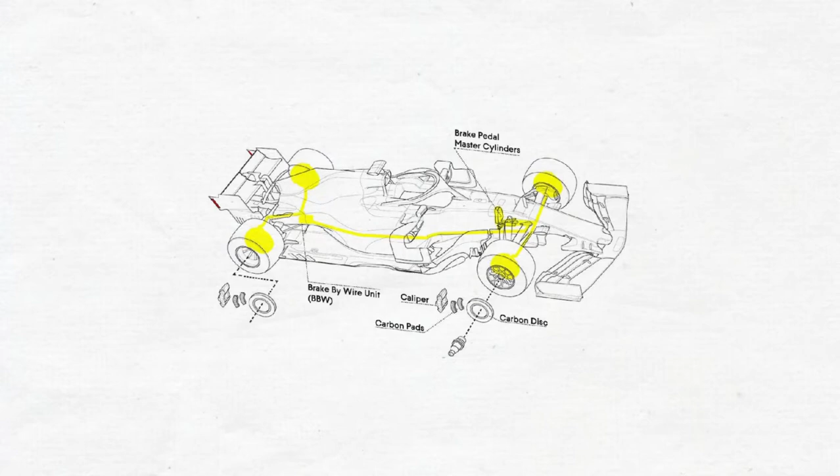A vehicle's braking system is the most crucial safety system available to the driver. It allows the driver to consistently and reliably reduce the vehicle's speed, avoid obstructions, maneuver traffic, and/or bring the vehicle to a complete stop. The braking system used by the Lausanne Motorsports team in their competition vehicle is designed to withstand higher temperatures and higher stress levels during its period of operation than a conventional vehicle.

Our team has been tasked to design a complete hydraulic braking system for the Lausanne Motorsports team, staying within our budget, time frame, and allowed rules. Through the course of the year, our team has been able to surpass numerous challenges, the first of which being the communication and coordination obstacles due to the unexpected global pandemic.

In the initial stage of this project, we were tasked with drawing up a comprehensive problem statement, outlining our stakeholders' application needs, prerequisites for each stated need, and approximate timeline for each delivery.

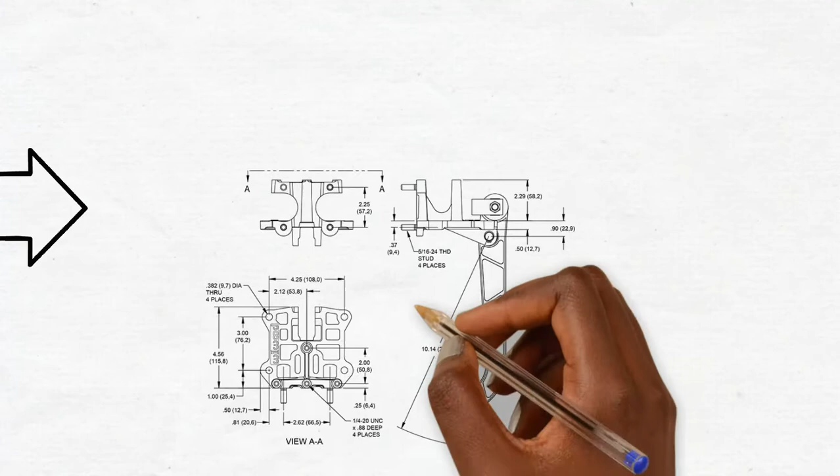Following this, we took into account design parameter thresholds given by the governing body, the FSAE. The most crucial design parameter related to the maximum force applied in the brake pedal box without component failure, and the overall four-wheel independent operation to improve redundancy and minimize vehicle stability compromise under braking.

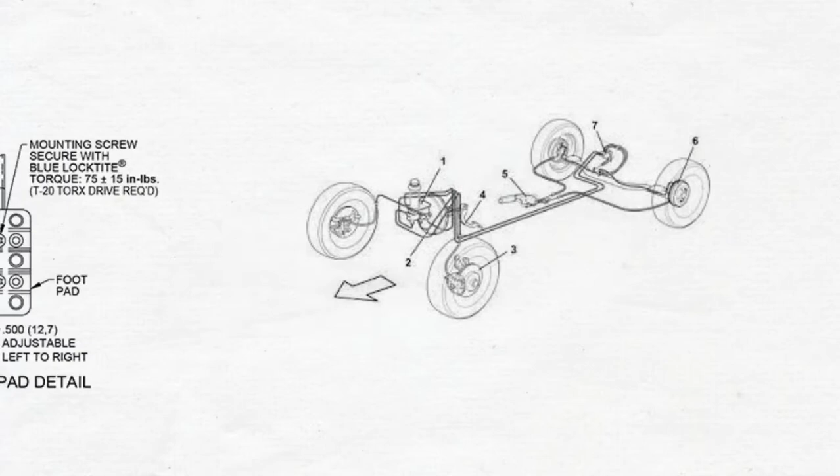Again, clarifying our problem statements, we revisited all stakeholder groups, their relation to the project, and how requirements supported our current problem statements. Our design is driven by a modular lightweight topology to maintain the vehicle's competitive edge and also allow a system to be easily integrated with different parts or components from another system to be designed the following year. We began material selection based on operation limit thresholds for each component.

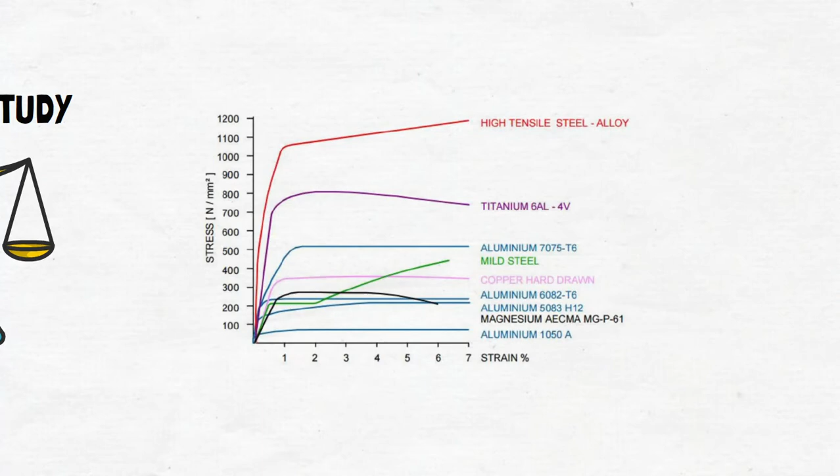For the components with high operating temperatures, like the brake pads and rotors, material selection was driven by heat dissipation capacity, strength to mass ratios, and thermal expansivity.

While for components hosting high hydraulic pressure, material selection was driven by strength to mass ratios, specific material strength, material flexibility on brake lines connecting to master cylinders, and pressure transducers.

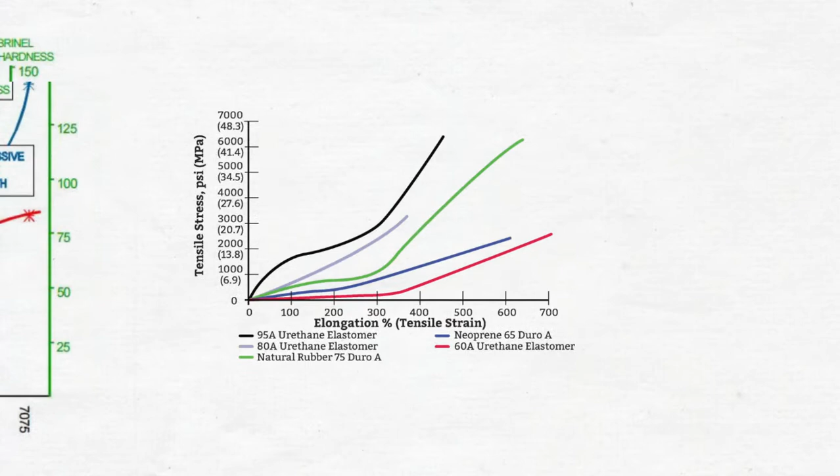We began procurement, sourcing our most critical components first. These are parts which their size and assembly location will directly influence the placing and selection of other components on the hydraulic circuits. With component selection complete, a fixed design topology, and material selection complete, our budget had now been approved, and our 2021 capstone project was starting to come to life.

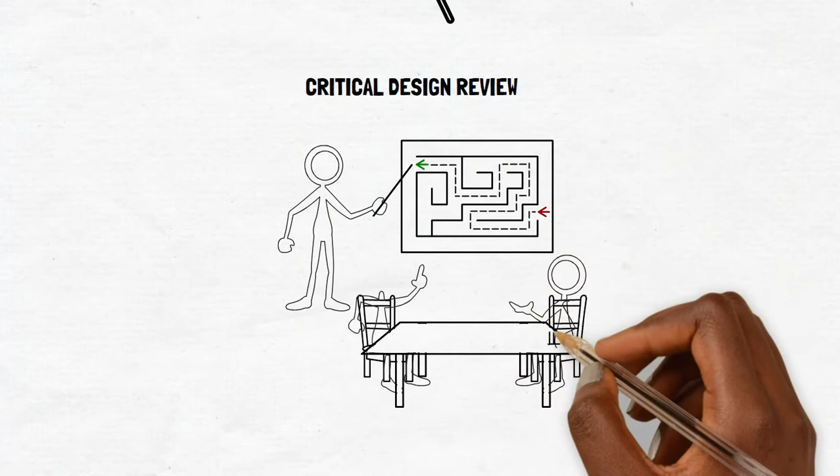At this point, our hydraulic braking system was starting to take shape, and we were ready to begin a critical design review. We outlined three distinct design solutions to the proposed problem, each with their merits and drawbacks. We carried out a detailed design comparison analysis to compare each of the three designs driven by our stakeholders' needs, safety, cost, and time. We then selected our optimal hydraulic brake design based on these matrices.

In our baseline design, we decomposed the entire hydraulic system into its core operational components, the first of which being the brake caliper. The brake caliper is a major component of the entire hydraulic system. It is responsible for slowing down the wheel through friction with the brake rotor. This component withstands temperatures above 200 degrees Celsius during operation, with pressures ranging just under 7,000 kilopascals.

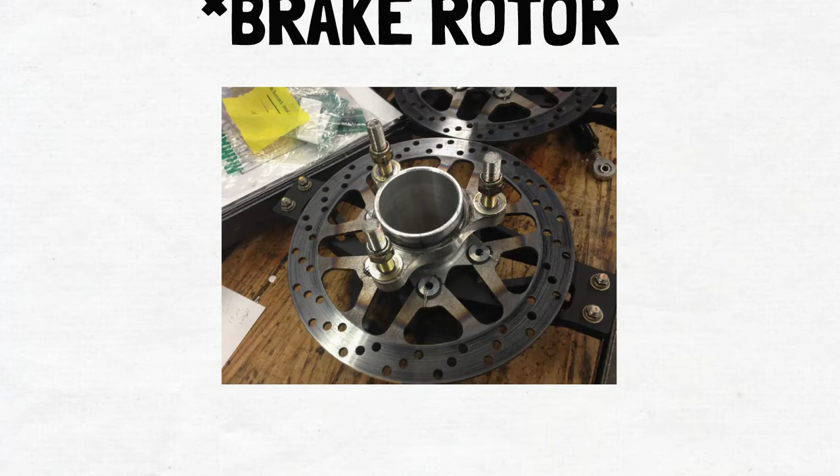Secondly, we have our brake rotor. This is the rotating component of the system fitting over each axle. The brake rotors are responsible for converting rotational kinetic energy into thermal energy. For this reason, the rotors become a major friction surface in our braking system and will withstand temperatures in excess of 600 degrees Celsius during operation. Optimal heat dissipation on this component has become a crucial concern in our design.

Thirdly, we have our brake pads. Brake pads are a major friction component on disc brake systems. They are responsible for creating friction with the brake rotor as the piston from the caliper squeezes them against the rotating surface of the brake rotor. Material selection of these components is most crucial, as it will undergo extreme pressure and extreme heat during operation.

The next component in our hydraulic system is the master cylinder. The master cylinder acts as the heart of the entire hydraulic system. It is responsible for transferring brake fluid under positive hydraulic pressure through the brake lines to each caliper piston.

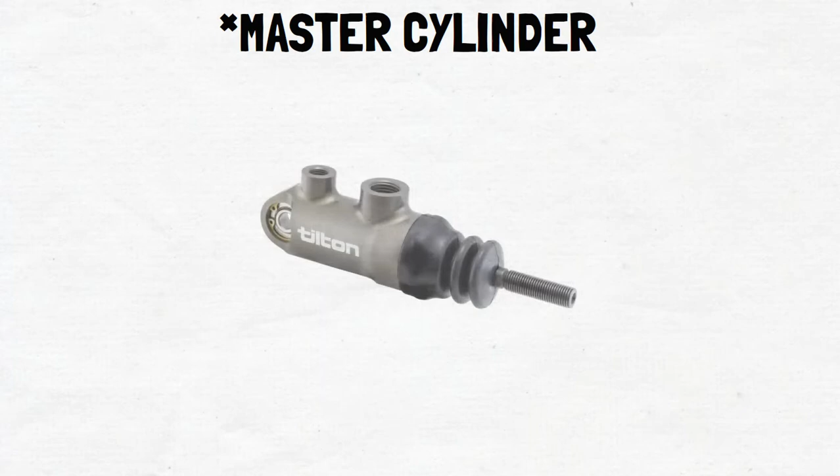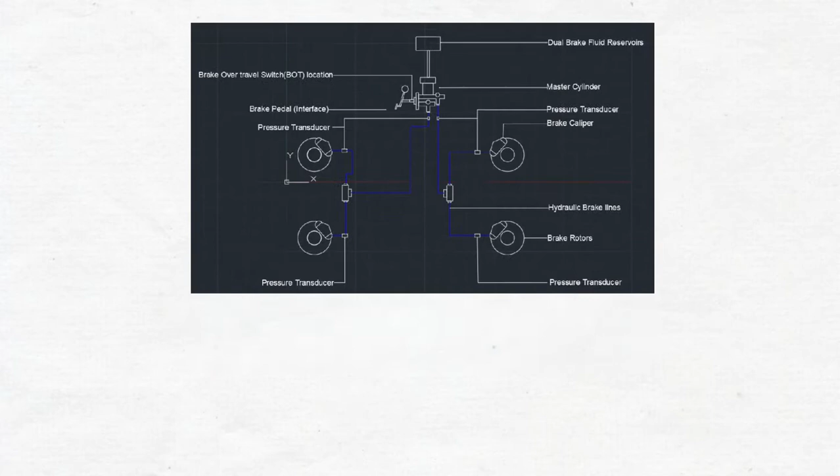Our current design makes use of a tandem-type master cylinder. This way we can have two independent hydraulic circuits with a single control, adding additional redundancy in the event of failure of one circuit. Our master cylinder is also fitted with independent hydraulic reservoirs and an adjustable proportioning valve.

As the master cylinder is the pump of the entire hydraulic system, brake lines are the transport unit of the entire hydraulic system. The lines used in our brake system will consist of a combination of rigid and flexible piping, with material selection currently set to stainless steel and rubber. The stainless steel braiding is used for improved cooling where possible, and rubber piping around the pedal box to allow dynamic pedal box positioning without brake line adjustments.

As said earlier, the master cylinder is equipped with an adjustable proportioning valve to allow brake bias control as per stakeholder or driver needs. We make use of a diagonal circuit pattern for the system's independent circuitry to reduce negative effect of vehicle weight distribution in the event where only one circuit is in operation.

The pedal box can be seen as a user interface between the brake system and the driver. It is designed to withstand forces in excess of 2000 newtons, with material selection set to be checkered aluminum.

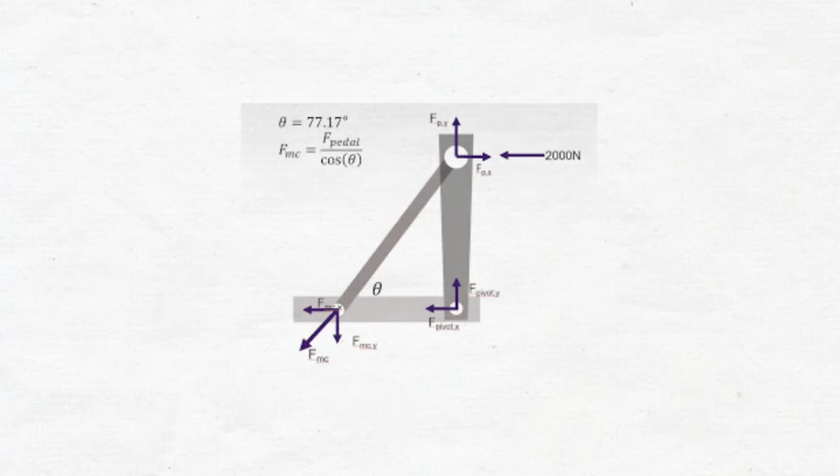To maximize the driver's mechanical advantage, our design aims to maximize the pedal ratio. This is the force acting on the master cylinder pistons divided by the force acting on the actual brake pedal.

We have also selected a swing mount pedal box, which allows us to exceed our force requirements with a lightweight aluminum frame and a high strength reinforced I-beam forged pedal arms, providing pedal ratios of 6.25 to 1.

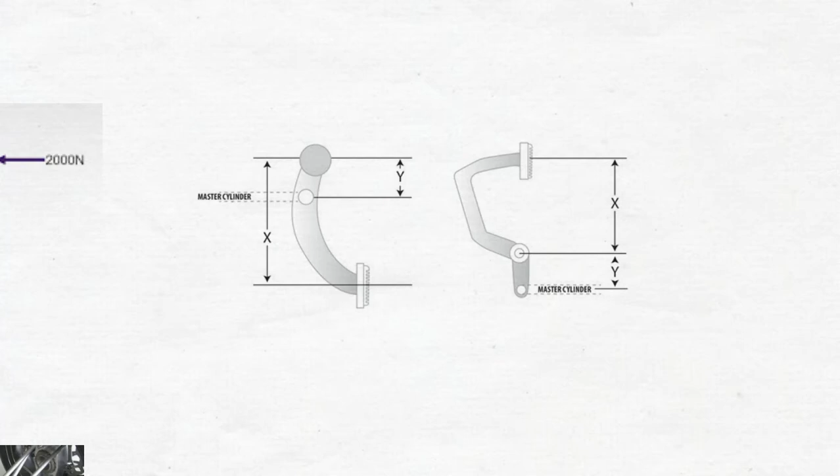Installed brake lights are in accordance with FSA rules, red in color on a black background, rectangular mounted as per 2021 competition rules. The brake light encasing will be designed with AutoCAD's 3D suites.

The circuit board is designed using Eagle suites. The pressure transducers are in series with the brake lines before each caliper. They convert hydraulic pressure into an analog value. Our current design makes use of Honeywell's MH series pressure switch, capable of sensing pressures between 24 kPa and 2700 kPa, with a maximum operating temperature just above 120 degrees Celsius.

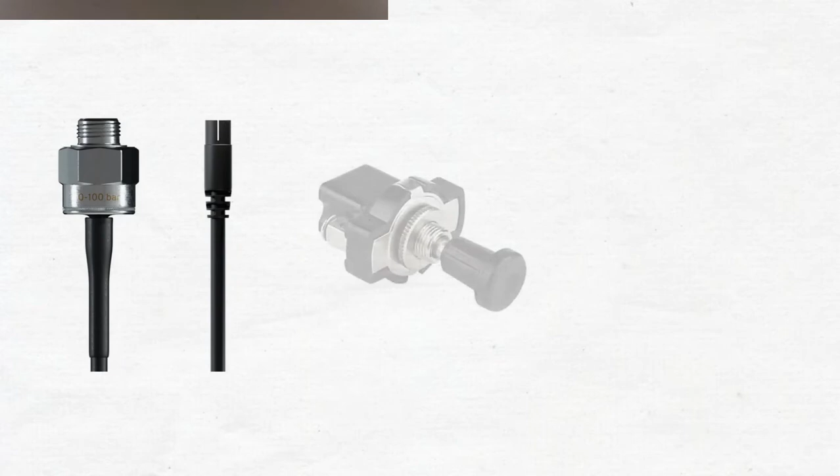The brake over travel switch is an FSA requirement and added redundancy in the event of complete brake failure. If brake pressure is lost when the pedal is pushed, the pedal will travel beyond its normal range, with insufficient pressure being applied to the caliper pistons.

The brake over travel switch will be activated, and when this condition is met, electrical power to the fuel pumps and the ECU will be interrupted and the engine will shut down. This switch is implemented as per FSA competition rules with analog components for additional system redundancy.

As known, our design solutions are subject to inherent risk, benefits, and drawbacks. Our trade study matrix provided an effective way to identify the most acceptable technical solution among our set of proposed solutions.

Our final design showed excellent heat dissipation capacity. The major property responsible for extracting heat from the circuitry is the use of braided steel hydraulic lines, along with the proposed sections of the vehicle chassis.

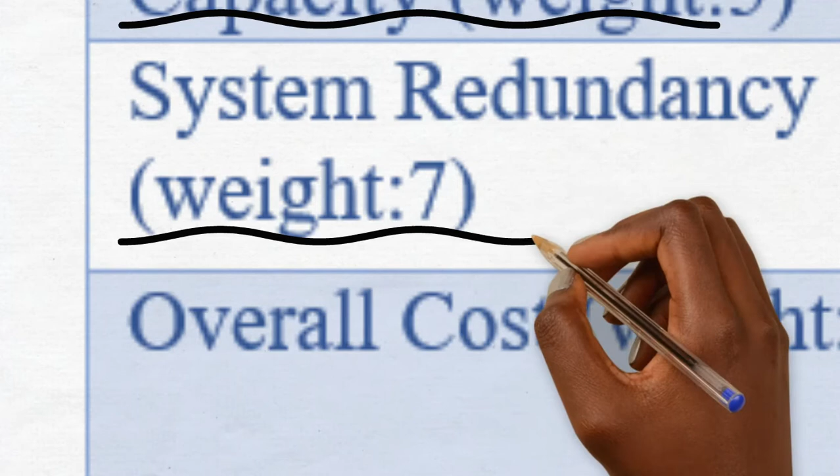Our solution also improved system redundancy, making use of tandem-type master cylinders for individual circuit control and a diagonal connection between each wheel. In the event of failure of one circuit, this solution minimizes the effect on the vehicle's weight distribution under competitive braking conditions.

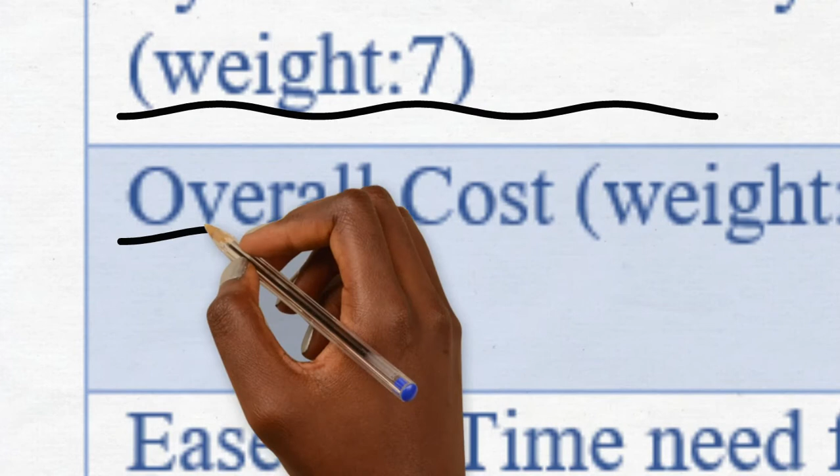Making use of a tandem-type master cylinder integrated with proportioning valves for each circuit also brings down the cost of the entire system. Our use of sourced components from approved FSA manufacturers also provides additional redundancy and improved modularity.

Sustainability can be understood as avoiding or minimizing the reduction of our natural resources to maintain ecological balance, in other words, meeting our needs in the present without compromising the needs of the future. Sustainable processes were a major concern and regarded as functional elements in every design phase. Through each design phase, we considered six interwoven factors in system design which we can control.

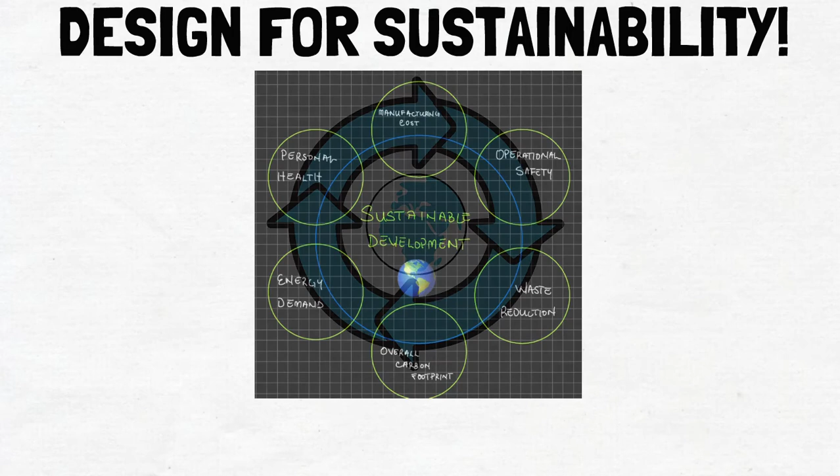The first was an initial analysis to see how each phase could improve the system's overall environmental friendliness. The second was a way to minimize costs of manufactured components.

After minimizing costs of manufactured components, we strive to minimize energy consumption during component design, manufacturing, and operation. Manufacturing and production planning will be done between cutting and bending processes during pedal box fabrication.

A fourth factor is that we strive to minimize waste of material in all processes. The use of wheel-mounted manufactured aluminum fixed calipers provides a significant weight reduction on the driven wheels, which also provides a continual reduction in residual torque.

This means the operational friction on the rotors when the brake is not being applied is minimized, and this in turn minimizes our wasted brake material and reduces the vehicle's overall CO2 grams per kilometer.

Fifth was operational safety. During the manufacturing process, we will develop, promote, and apply safety standards to minimize any unreasonable risk as a result of functional insufficiency. And last but not least is improved personal health.

Friction material deposits and their impact on our health has been a major concern in brake development over the last century. We took a team initiative as Renaris engineering students to specifically select brake pads manufactured only with the use of earth-friendly materials while maintaining our competitive edge.

We made sure to exclude any materials made with parts of lead, asbestos, nickel, or any harmful ceramic fibers like antimony trisulfide.